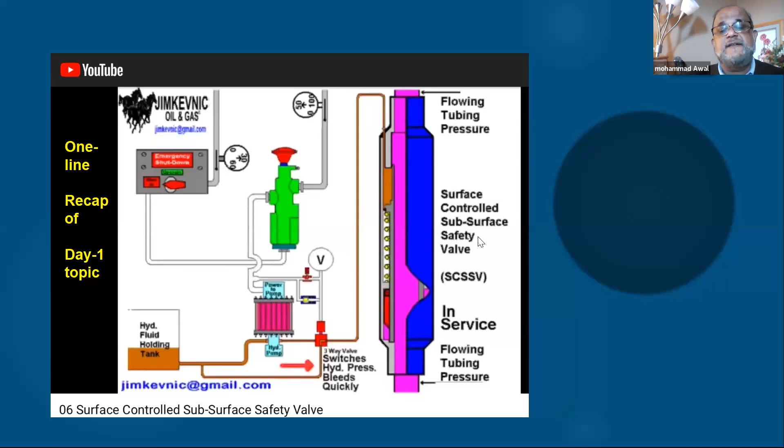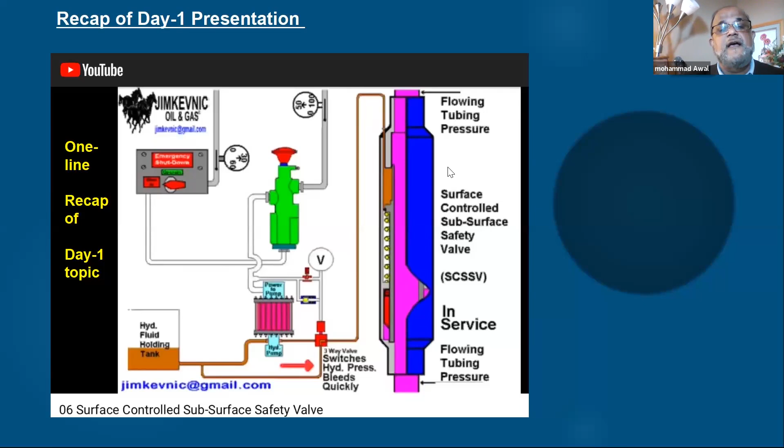Okay, so with that in mind, I want to spend a couple of minutes on yesterday's presentation as a recapitulation, if you like. If you remember this, fine, if not, then this is what you call the recap of yesterday's, and I'll give more information.

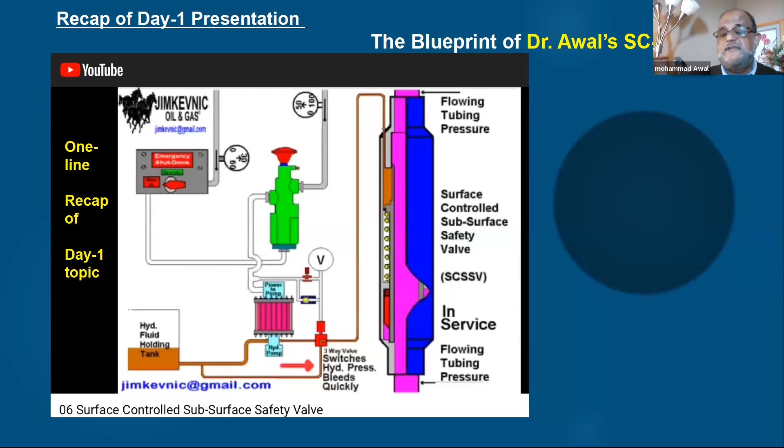So I call it Dr. Awal's surface control, allow me to use my name. Surface control, subsurface casing safety valve. And I invited you personally and through the quiz also, those who take the quiz, but in general, please let me know if you have found this new concept, which is an extension of the existing tubing safety valve subsurface. So this is the picture of the tubing ESD, emergency shutdown system, and it is for tubing pipe.

This tubing pipe setup has been there for at least the last 50 years to make sure that if something goes wrong at the wellhead, because of an accident, hurricane, tempest or sabotage, and the wellhead is blown out, there is no uncontrolled flow of oil or gas. That's why some 500 to 1,000 feet below the ground surface, this valve, shown in pink and blue, is installed and controlled from the surface. That's why it's called surface control, SC.

SSV stands for subsurface valve, but there should be one more S here. This is from Mr. Jimkevnic, oil and gas. He did a good job, but he has a spelling mistake too, so no problem.

This is an existing system, designed for tubing. Tubing and casing are the same thing really, there's a general terminology in the oil and gas industry, we call it oil field tubulars, OFT. It means the drilling pipe, the casing pipe, the tubing pipe, all these are called oil field tubulars, that's the generic category. Drilling pipe has a different purpose, so they're thicker because of load bearing and torsion requirements. Without going into details, we can use this system for casing too, which will be slightly larger, maybe by an inch or 2, 5, or 10 inches, but casing is still tube. So what's good here for tubing is also good for the casing part.

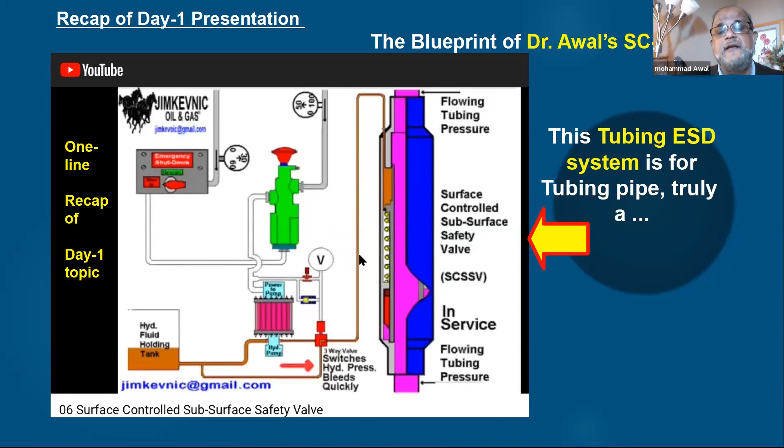I call this tubing ESD system, designed for tubing pipe, but it's truly a low hanging fruit. So what do we do with the low hanging fruit? This system, which I've named after my own name, not to brag, but to remind you this is a new idea I'm carrying forward so you can take it and make it happen as a casing safety valve, both on surface and below. You are giving the well safety engineering an autonomous safety device the world has been waiting for the past 120 years since the beginning of oil production.

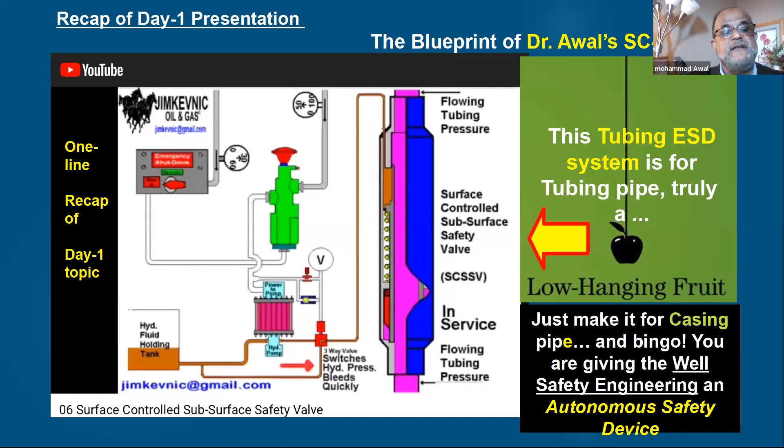This is no bragging, this is a clean fact, just like the sun shines. That's my one line recap of day one's topic. So what are you waiting for? I'm an old man, time to go, but you grab this low hanging fruit and give the industry what they've been waiting for. With that, let me move to something a bit more specific. This is really important.

Allow me again, so this is the conventional system. While drilling, let's say we are drilling to the production casing string, through the intermediate casing, and our target is to reach the reservoir. Once we go a little past the reservoir, say by 300 to 400 feet, we'll run the production casing. Then the blowout preventer, which was sitting on the intermediate casing head, will now sit on top of the production casing head, until we run in the completion equipment, which is the tubing strings with packers and subsurface safety valve.

And ultimately, it will be hung from the tubing hanger above this production casing head.

So when we have this blowout preventer, which is supposed to take care of any eventuality like a blowout and a gas kick, we often see it fails. And when it fails, then God help us - the devastation goes on. Once it happens, it takes weeks or months or even a year to control the flow and stop the currents of the mad well, if you like.

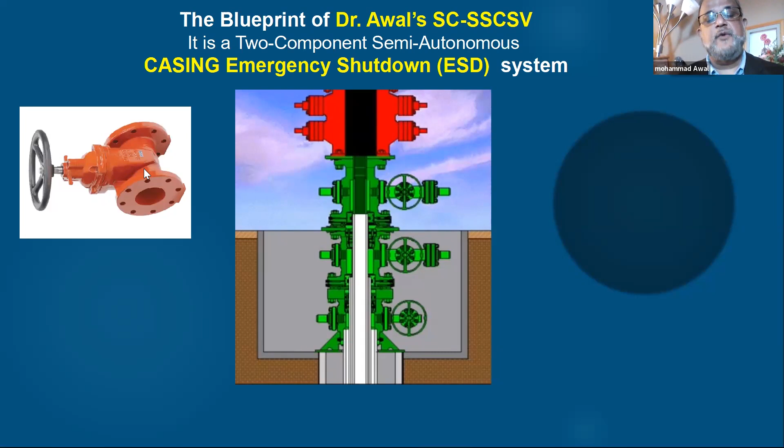I have put another picture. This should go somewhere in the top - where? I showed it just above this, the current casing head. It will go and sit here. So once you put this in, you'll have your own flanges with bolts. You just put it over there, and the BOP will go on top of that.

So you have this first, and I want this to be called a surface ball valve, or a gate valve - it can be a gate valve also. This diameter will be the same diameter. This ID of this valve will be the same ID as the ID for the casing over there.

And here is one thing: make it manually operated. We'll say, well, we have hydraulic control, electric control, why don't we do that? Remember, we are talking about its use after the accident has started - fire and fire and fire. So don't put those fancy things. For good times, for bad times, trust your good God-given hands.

Use it to turn this wheel. Okay, you don't need a daredevil - they are putting an umbrella of water on top of you as a canopy to keep you from getting scorched by the fire or whatever. This is the first thing.

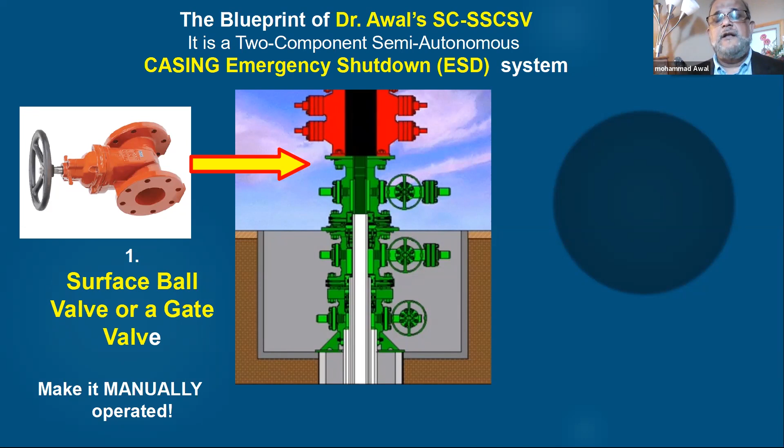So two is better than one. Yesterday, someone asked a very beautiful question, and there was not much time to answer that because most of you in the Middle East were going for iftar. So I had to give a very short comment, but I'll deal with that fully on the last day, the final day - what happened to the Macondo well blowout.

We know there was a huge investigation, which is good, and the final report gave advice that there should be two sub-sea blowout preventers, not one. In case one fails, the other can work.

It is fine. But as I mentioned yesterday, when it was going on the third day of the Macondo blowout, many petroleum engineering professors, including myself, from America and also South America and Canada, were present. They were invited beforehand, a month before that, so they kept that commitment. We were in Houston, taken from our hotels by BP, British Petroleum.

No, they call it BP - to their new, beautiful, truly marvelous headquarters in the energy corridor of Houston. The vice president of research welcomed us and gave us a talk, but he didn't talk about the Macondo blowout for whatever reasons. Fine.

But when the investigation began, after two months, we received an email in each department of petroleum engineering that the government inquiry commission had compelled BP authorities, among other things, to give some funding to develop new ideas on how to handle this kind of situation.

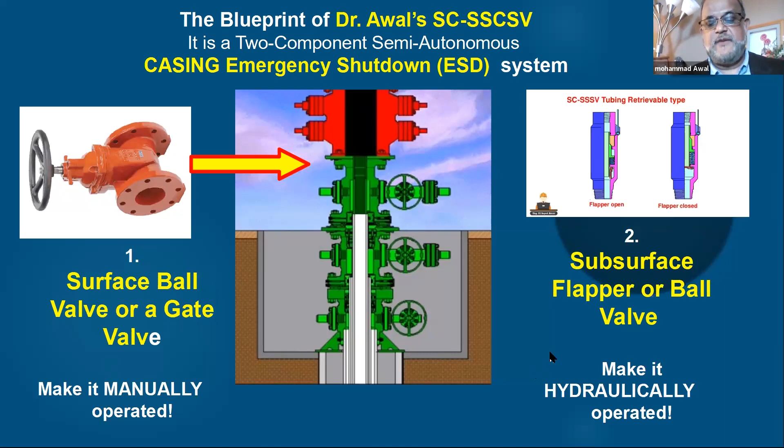So again, before I leave the slide, I emphasize: don't bring this idea of hydraulic control over here. Hydraulic looks hi-fi, high-tech, good, but not for here, not for here. I have explained, so let me go forward.

So now we are continuing our journey, and today is day two. Day one was what we just recapped. Day two is today: sustained casing pressure, and what we want to present today is a sustainable approach to fugitive emissions from wells. Sustained casing pressure means the casing annulus has a valve at the top, so if gas comes into the casing annulus because of faulty cement, it develops pressure, and that is called sustained casing pressure.

The practice is some operators go to the well and bleed that pressure to keep the casing safe from increasing pressure. But I believe the greater emphasis should be not to protect the casing - yes, we need to protect it, that is our business - but to protect the environment. We'll see how much gas goes to the atmosphere, and that gas is methane, not CO2. Methane is one of the baddest of the gases, more than CO2, 40 to 70 times worse.

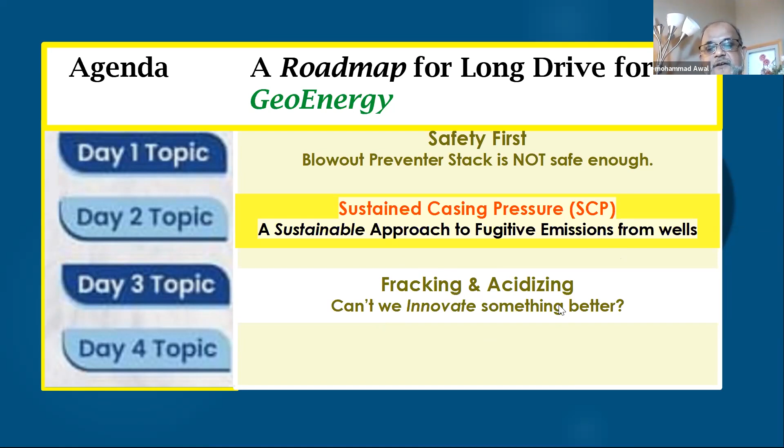We'll see that. And of course, tomorrow will be fracking and acidizing. Again, this is connected - why we need fracking, because of something we'll discuss. Ultimately, we'll put everything together to rebrand petroleum engineering. Because when people hear petroleum engineering, they say, 'Oh, you are the fracking guy, you are ruining the environment,' and they blame us for all the new CO2 from combustion. So we don't want to carry that name - we want to explain that we are not guilty, but to prove that we can convert hydrocarbon to hydrogen ultimately in the reservoir.

In between, we have the transition path to catch up with carbon capture and sequestration and all those things. But ultimately, I believe there is technology, there is enough science available for the last 50 years. If you put them together - and that's why I'm sharing with you - then we can really convert hydrocarbon to hydrogen, not only at the surface, which many people are doing, but in the reservoir. So now, what makes methane emission harmful? I mentioned that, and here is the information. I'll go quickly.

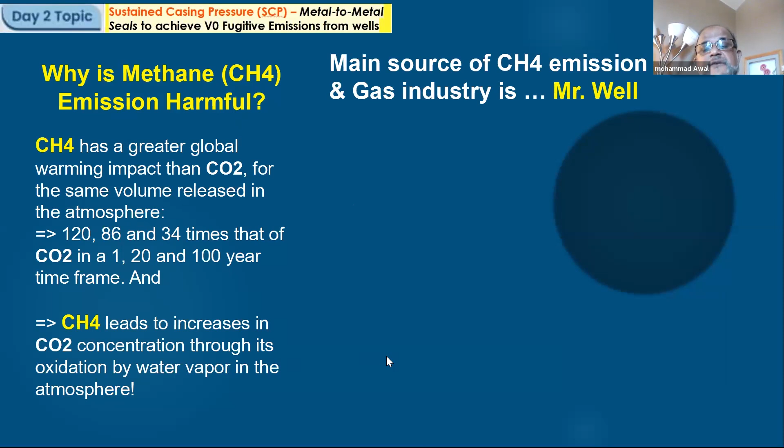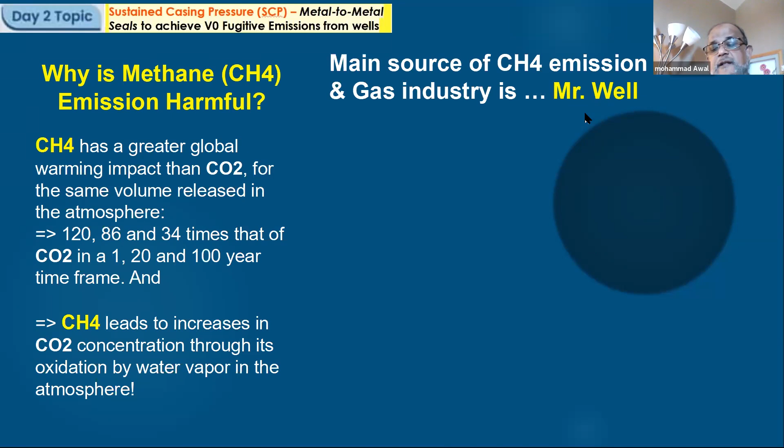So the next question is about fugitive emissions, definitely from the oil wells, that's what we mean. We picked that up, that is our business. We are not talking about methane emissions from cow dung or animal droppings, that is not our business. So we are petroleum engineers or mining engineers, and we ask ourselves, from which part of the industry is this gas being leaked or released into the atmosphere? The answer is Mr. Well. Not Mr. Jackson Well or Mr. John Well, no, it is this well.

Now this is not my drawing, this is from a journal paper. I think I put some link somewhere, so you'll find it when you click it. It's a scientific journal paper, and it has identified 6 different problems with the current best practice.

Why do we say best practice? Because we have to put casing and we have to put cement behind it. The mother of cement is called Portland cement, but the American Petroleum Institute, through decades of research by scientists, advanced the formulation by adding many ingredients for different depths and environments that the cement will encounter. We call it API class cement, A, B, C, up to G. That's tremendous good work, but the question is how good it is underground behind the casing over time.

These kinds of problems come up. The net takeaway is that they are not holding their fluids as they're supposed to, from flowing through behind the casing, which is the cement and the formation. They're not doing the job because they are not good, the Portland cement and whatever ingredients you put in it.

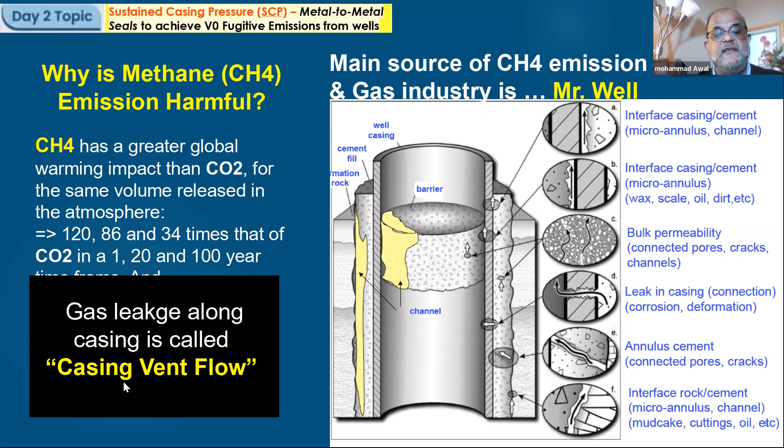Now there is another flow from the same source, the same reservoir, called gas migration. This is your source, the production zone, oil is there, and there will be dissolved gas, or if it's gas everywhere, no problem. So if the cement has a problem, it will not only go up, because at the surface it's not open, the casing is closed with a valve, so pressure builds up. When the pressure builds up, you are worried it may destroy your tubing or do harm to your casing itself.

But that pressure also helps drive this through this part over here. And it goes out, because this is porous media.

These are from some field measurements around the wellbore. They find that gas migration is around 10%, but most of it is 90%, because from time to time they open it. I myself opened in Bombay High offshore, and a certain amount of gas comes out. But that was 1983, 85, and those are conventional wells, not fractured, so we didn't damage the cement. Still, because of microchanneling and also debonding or imperfect placement of cement while cementing, there was leakage. But with hydraulic fracturing, the first thing you do is destroy your cement with 10,000 psi.

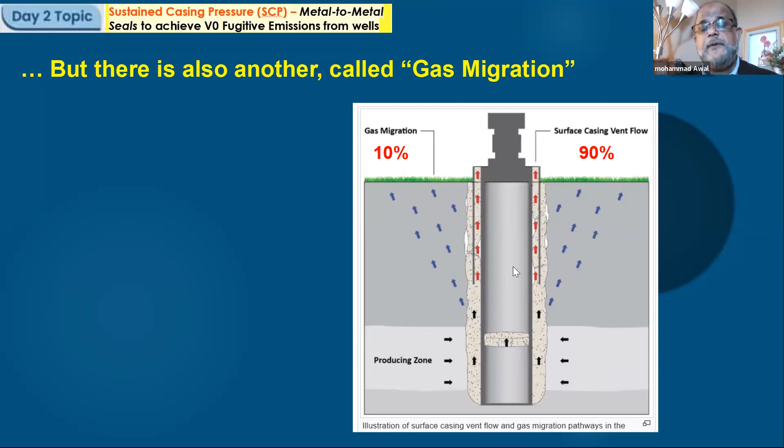But they pay money to some, even petroleum engineers, they call them consultants, or professors, God knows. And they say there's no problem, everything is perfect, everything is perfect. We are not criminals, blah, blah, blah. So let us look at the facts. So how much gas comes out?

Now here is some statistics in beautiful colors. I'll show you, all this color has a meaning. Who emits methane in the atmosphere?

We'll see the number one culprit is onshore petroleum and natural gas production. This is 117 million metric tons of CO2 equivalent. Meaning methane, remember, methane is 40 to 70 times more harmful than CO2. So they express the methane in terms of CO2 equivalent, and that is about some percentage.

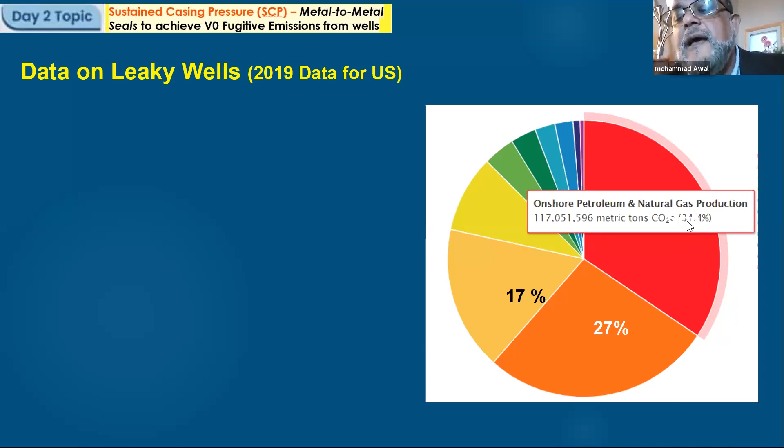It is not shown, but it will show over here. I'll show, yeah, 35%. And this is about US, and this is data from 2019, from US government source, US Energy Administration. It's very credible information. But all those numbers, since they come from reporting, this is the minimum. It could be more than that.

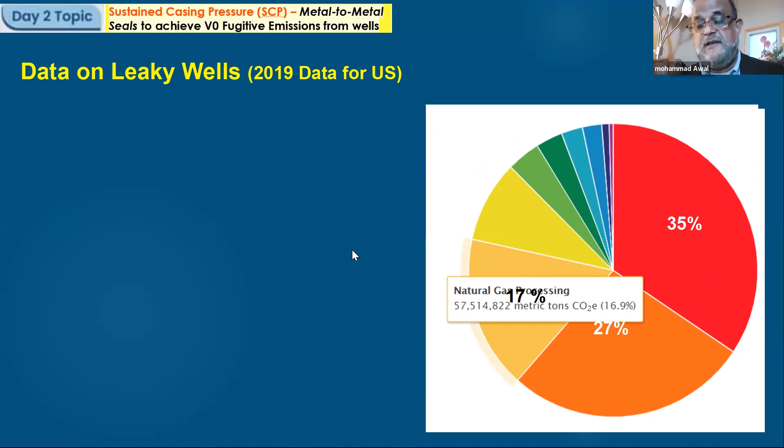So I'll bring out a table over here. Onshore production gives in US 2019, 117 million tons, which is 35%. Next comes gathering and boosting, 92.5. What is gathering and boosting? And offshore is very less, 7.3. Why? Because offshore, the capital expenditure is so high, and they have to get that money back over the next 20 or 30 years.

So they put the best casing, best pipe, and everything, and best cementing practice. That's why. And onshore, there are at least 10,000 companies. The biggest company is maybe, let's say, ConocoPhillips or Chevron or Oxy in America. I was an employee, research and staff, R&D engineer in ConocoPhillips from 2013 to end of 2015, so they are good, that practice is good.

But most of them, let's say 9,000, 500 are small companies, so they have to cut corners to make a business. And the smallest company is called mom and dad company, meaning father, mother, and the technician. So they cut corners, and that's why the onshore production emissions is so horrible.

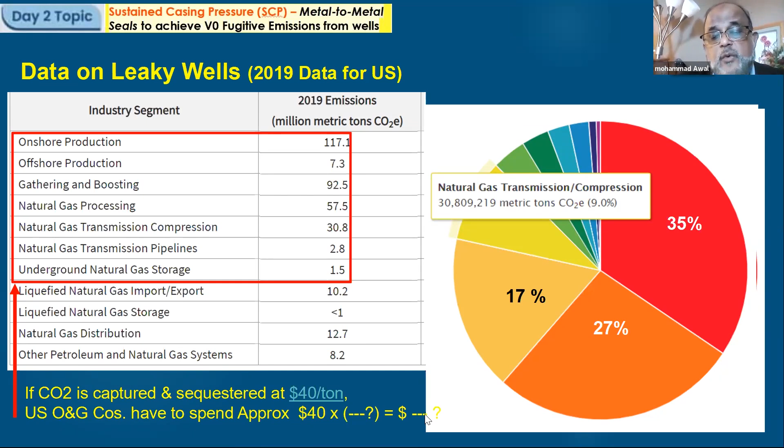So like this, ExxonMobil, the largest oil company in this country and maybe 15th or 17th largest in the world, has announced it will spend $100 billion over the next 5 or so years. What will it do? It will capture carbon dioxide from its facilities or from the atmosphere, and send it down into deep formations, far deeper than oil and gas reservoirs, for sequestration. $100 billion. So I want you to compare this number with that number, 100 billion, okay?

And that's a quiz. So I found here already, for this case, $5 billion. That $5 billion is in 1 year, 2019. So for 5 years that would be 25. But Exxon has put $100 billion.

Of course, as the news goes, the company is not putting all $100 billion from its own pocket. It will get some handout, some portion from the federal government, the economic stimulus package or whatever you call it. You wonder why so much? For the whole country, it needs $25 billion to capture and sequester CO2 for 5 years, but here it's 100.

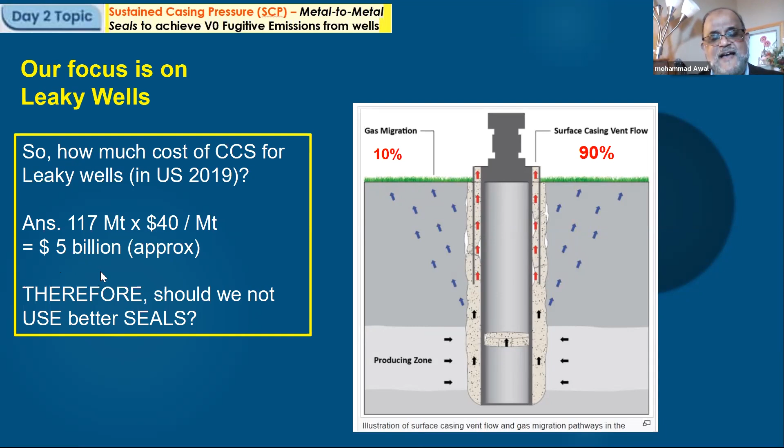So I don't know, you keep your guess. I mean an honest guess, not a conspiracy theory, I don't like that. Okay, maybe they'll rent the facility they have. Oh, we have surplus capacity, you have CO2, put it in over here, and the bill is $40 per ton plus our profit margin, whatever. So it will be just like making money by refining.

Do you know about refining? They are not very rich, they make a small margin. But since the sale is volume, that's how they make money. Per gallon it's very little. That's why in the US, when you go to a gas station, you see the gas price, $2, then 20 cents, then another 0.9, the fourth place of the decimal, okay? But because we buy so much gasoline in America, the highest consumer in the world, that's why they can survive from that small margin but big sale, okay?

Now my question is, that previous picture you have seen, the casing venting, they show only the production casing. My question is, we petroleum engineers know there are many casings. This is the production casing, the blue one. Then we have the intermediate casing, and ultimately the surface casing and conductor. Don't you think there will be something coming, venting from here, or migration from here, or migration from here? So that is my question, and I want your feedback. That feedback will come in the quiz. Or if you don't take the quiz, of course, if you're a professional, why should you take a quiz? You don't need that. I have given my email on the first slide, please let me know.

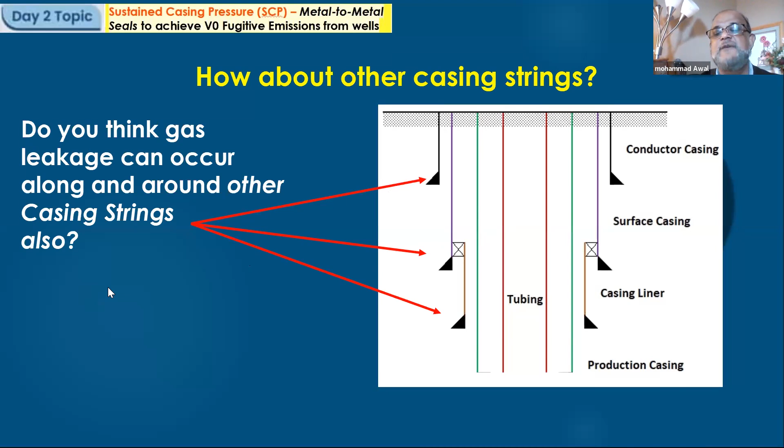Now, I come to some more business, something happened here, this I have shown. This is the ExxonMobil Ohio unconventional gas and oil field. Okay, there was all these wells, one well here, and one well here.

Why are they so close? Because nowadays, to cut the cost of shale drilling, completing and fracking, because the oil price went down in 2014 from $100 to maybe $39 per barrel, this is a survival technique, mother of invention. So to cut the cost, to beat the low price, they drill what they call a drilling pad from one drilling site, 1, 2, 3, 4, 5, 6, they drill directional wells. You don't have to go far. So one rig will be there, and they call it a walking rig. The walking rig will drill one here, put the casing, and by the time the casing needs some time to set cement, it will move here, and then it will come back, and go over here like this. It's just like one dentist and 20 patients in the dentist's shop.

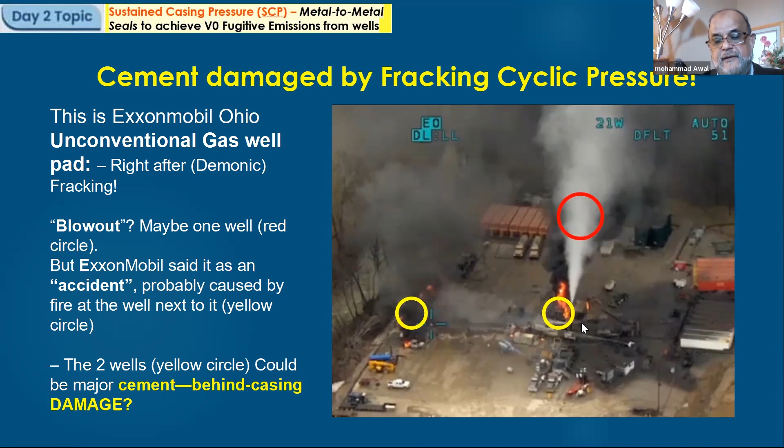So this is a blowout. Fortunately, firefighters were there, so there was no fire over there. So this is a blowout, and these are proof of the pudding that cement failure is much worse during shale fracking because of high fracking pressure, which the cement is not good to take.

Now there are many reports, but I have selected a very credible source. Why credible? This is USGS, United States Geological Survey, a federal organization. They answer the question: can hydraulic fracturing impact the quality of groundwater or surface water?

By the way, this hydraulic fracturing here doesn't mean conventional hydraulic fracturing. It means shale gas or shale oil hydraulic fracturing, which has to apply much higher pressure to break down, and for a longer time. And they have given an answer, so I have made this answer a little bigger for you to read.

It says this is the same thing over here, but I just copied and pasted: conducted properly, hydraulic fracturing, or fracking as people say, has little possibility of contaminating water supplies. Water supplies means the groundwater.

In Texas, we drill a water well around 200 feet below. There's a huge aquifer, starting from Montana north, thousands of miles, a natural water reservoir. During those millions of years, 30 to 50 million years ago, there was huge rainfall, and it went down and formed a super giant aquifer. It supplies water to several states in America, from Montana, 1,000 miles from here, all the way to New Mexico, Arizona, and Texas, and its name is Ogallala.

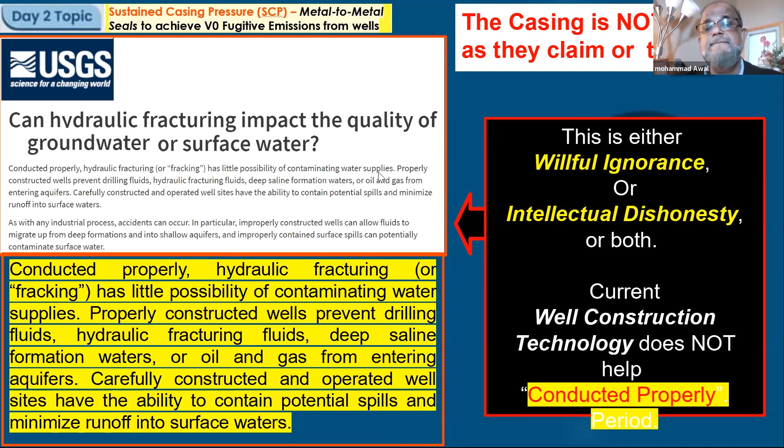So be careful. Now I take you to one fine place, again in the north side of America, near Ohio or somewhere, where we have the Marcellus Shale. Everything looks perfectly green, beautiful. And they say we put casing pipe, we put cement, this is thousands of feet below, there is absolutely no chance for anything to go wrong. And those who complain about groundwater, maybe they are fabricating this.

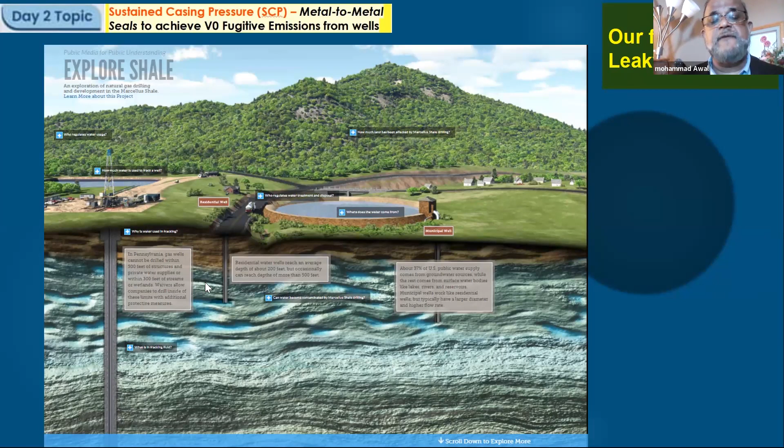But that's again a lie, because this is a statement. It is not my statement, this is from a credible source, published. Researchers postulate - why do they postulate? Based on knowledge of rock mechanics, strength of materials, that leakage problems are more likely to happen in unconventional wells, in shale, which are hydraulically fractured, than in conventional wells.

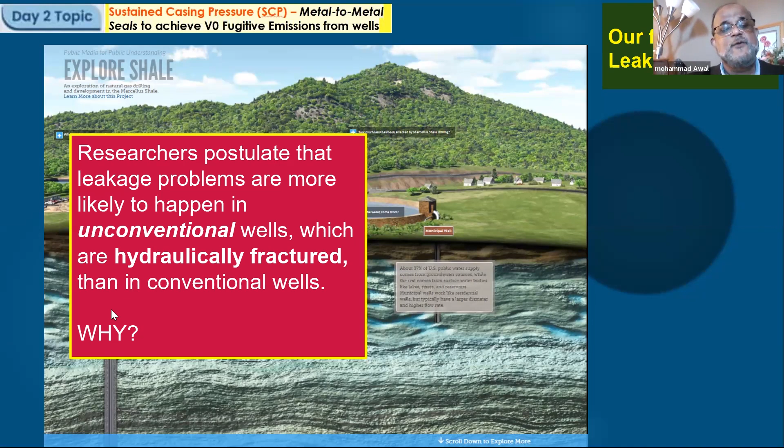But now the question is why. So I have tried to give that. This is 10,000 feet long casing and cementing. They say no, that is not the case. I'll tell you, so you did this part yourself, and I will show you what I have written here.

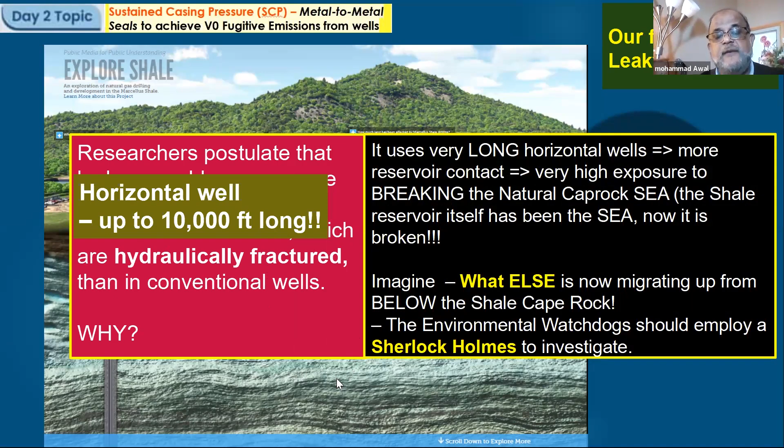So this is, let's say, a 10,000 foot deep well somewhere underground. This horizontal well is deviating, it becomes horizontal, and they frac in stages: stage one, stage two, stage three, up to 150 stages, about 10,000 feet long horizontal well. Every stage they have to frac at around 20,000 or 30,000 psi and keep pumping, boom, boom, boom, boom, boom. All the casing, the fluid goes to the surface.

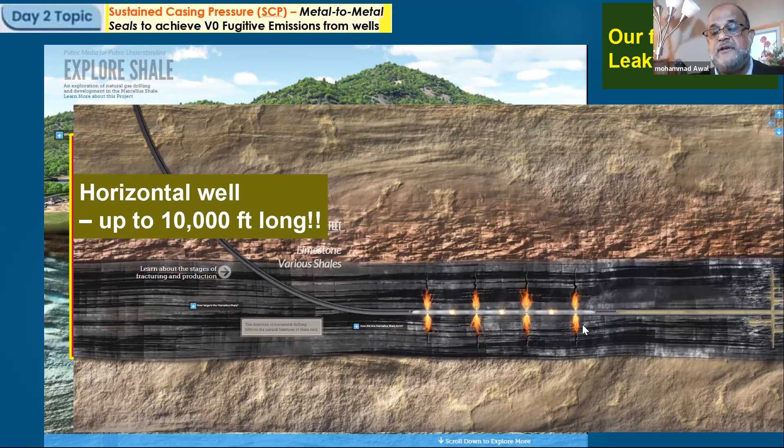Everywhere the cement behind is under tremendous jackhammering action, compression, decompression, compression, decompression - it is devastating. So I'm bringing now what is below that. Do you know what this shale is? Shale is what we call cap rock. It's impermeable, that's why it has been there for millions of years, stopping the migration of fluids from below.

Now when these fractures go up, fractures go down, fractures go to this side - imagine if the fracture goes like this. The fracture could be 100 feet long, 200 feet, 500 feet, 1,000 feet long. Imagine this fracture coming over here. So now there are fluids here, in the porous media, with sulfur, with heavy metals and whatever, plus hydrocarbon or whatever. All these things could not come out before.

They were locked down hole like Aladdin. Aladdin was sleeping inside that lamp, fine. But the moment you rub it, it gets hot, it comes out as smoke. It says, I'll kill you. Now that is killing us. All those things are now released.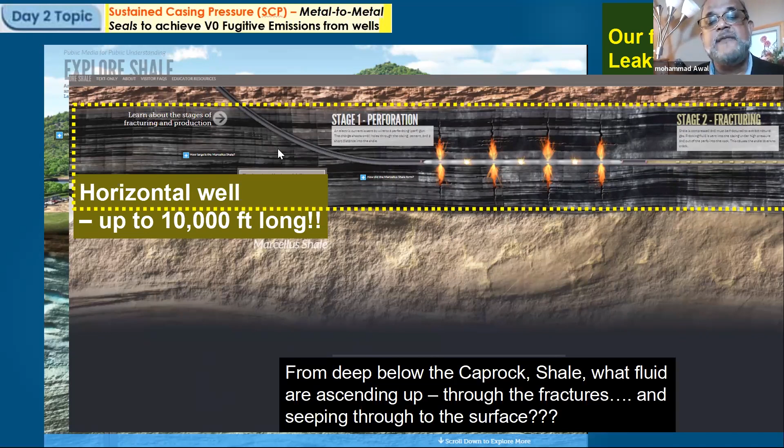And they say, wow, come, there's a highway. All these casings are as much shattered as this rock over here. This cement is not hard enough, it's not strong. We call it fractures because of tensile failure. Those who know rock mechanics, they know what compressive failure against compressive strength is, and what tensile failure against tensile strength is.

Rocks and concrete are very weak in terms of tensile strength. A concrete bridge or building has 10 times higher compressive strength - that's what lets them take the vertical load. But when it comes to tension, they're very weak, maybe 1/10th to 1/12th. So this shale has maybe tensile strength of around 1,000 psi, pound per square inch. That's why it is easy to frac them, and you want to frac them long enough, that's why you need 20,000 psi.

The cement is weaker than the shale. I measured that in my rock mechanics lab, which I established in the Department of Petroleum Engineering, Texas Tech University, which I first established at the Research Institute of King Fahd University in 1995. Then we, with money from Saudi Aramco, did rock mechanics and geomechanics research for them. Saudi Aramco has its massive advanced research center with a sophisticated rock mechanics lab.

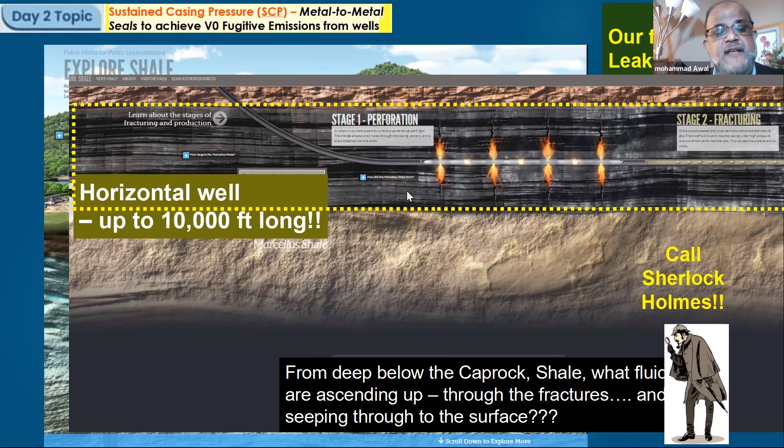So let us continue with this. Now the question here, the learning takeaway from so far—I wish I could give you a break. If you want, I can, but I have no control.

So the takeaway from here is that casing is not enough. Because of the cement behind it, it's not enough. There are huge emissions, and I have shown you real statistics from the government. The actual number is much more than that, and there are some links—if you hover your mouse on those slides, you'll see the links.

So we have to conclude that this Portland cement, and its advanced form customized for oil well environments, was doing a good job until massive hydraulic fracturing came along. When fracking came, we know all the praise for horizontal drilling and putting hydraulic fractures in, but we don't talk about the bad things. That is not fair—in the scientific community, they always look for pros and cons, the merits and demerits, the good things and the bad things.

Why? So that we can do further research and remove the bad things. Now we see that with cement, we cannot do anything other than replacing it with some other advanced material, some kind of polymer, and those things exist. Plus, cement alone is not enough—two is better than one to protect the defense, and three is even far better. So here comes the question of metal-to-metal seal.

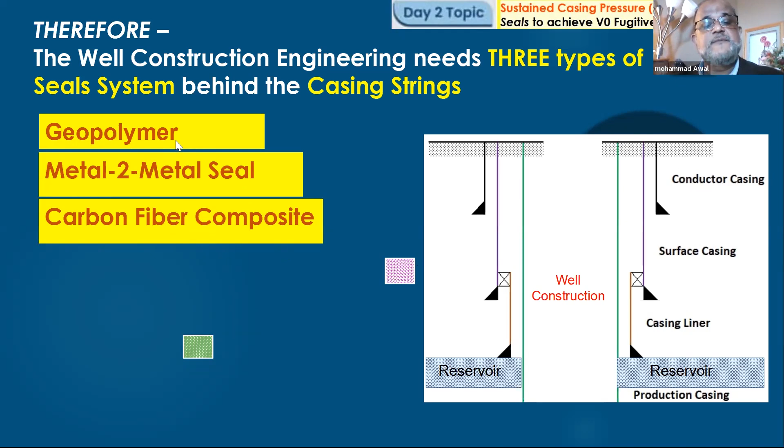That dual objective helped me find out something, and I'll show you. Cement has to be replaced by something, and it has been there since let's say 2000 - geopolymer from France, I'll show you. The API class of Portland cement is very inadequate. It's been there since the late 1800s, but because we didn't frack at that time, which was good.

We started fracking wells from 1947. Even then it wasn't that bad, but after 2000, thanks to the brand new fracking technology invented by a tall, old petroleum engineer, George Mitchell, may God bless him - he is now not around us - the world embarked on massive hydraulic fracturing to frack the unthinkable cap rock, which is shale, to find every amount of gas. It has no permeability, so we break it down in a demonic manner to bring it out, and that high pressure creates problems.

So we need to go about geopolymer. This is what I'm presenting to you. Now I look at this diagram - I know my students are there, and all the books showcase it with a shoe, as if they put a shoe over there, and it looks like a shoe. No, it is not like a shoe, it is like a stepper down, but this creates a mental block.

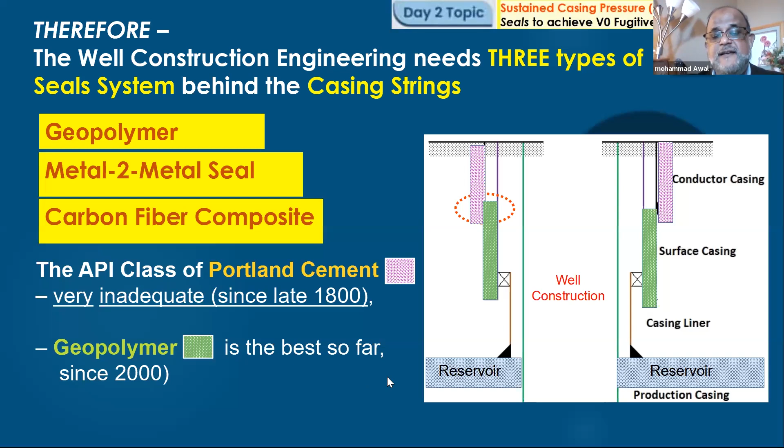A little bit of a story about geopolymer - this is the inventor of geopolymer. He's a chemical engineer, Professor Davidovits, in France. Now he's become world famous. You'll read that he has shown that the pyramids are not rock blocks cut from some mountains and then hauled - they were made on site, and he's making it himself in his research institute, called the Geopolymer Institute. It is now world famous - you can go and see, and make it yourself.

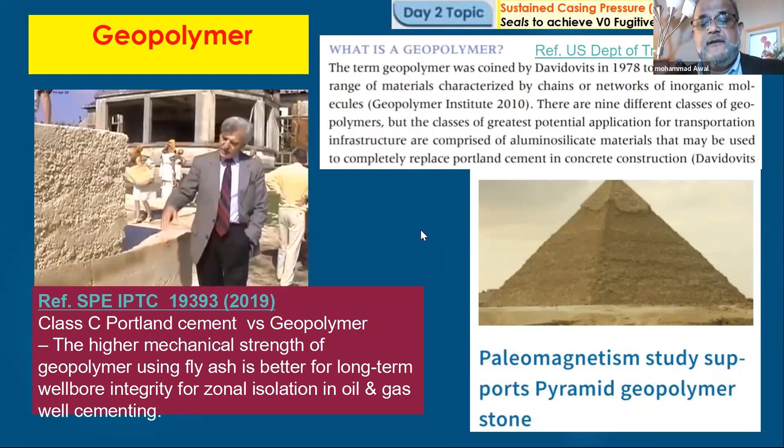Let's come back to our industry, the oil and gas industry - the classic Portland cement versus geopolymer. Here is the verdict: it is already proven, but we are slow to move.

So now I move to the other one, metal to metal. There are two concepts now: one is called type 1 thermite seal, and the other one I'll show first. Thermite seal means you take a mixture of rust - basically hematite, rust, I'll show you the diagram, ferric oxide - and aluminum powder, mix them together at certain ratios and provide some source of heat, because this is an exothermic reaction, but it needs a starter, and then it will catch up the reaction.

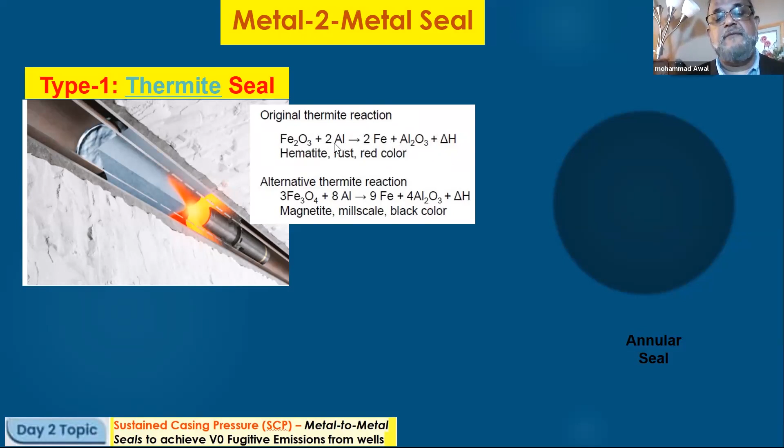Extremely high temperature will be produced, around 1500 degrees Celsius, to melt it. The ferrous that comes out from the reaction is iron, in molten state, and this is aluminum oxide. Aluminum metallic powder takes the oxygen from here, and this is a massive amount of it. So this is the simple technique. They call it Goldschmidt.

This is from 1895. They use this reaction in railroads, to make connections between two rails, they use the same thing. You'll see lots of YouTube videos on that. There is another oxide, but same thing ultimately. It's so high temperature that in some experiments it melts the steel also.

So this is good when you want to close the well bore permanently, meaning plug and abandonment. We put cement plugs before abandoning a non-economic well, but that cement is cement, so they say put this one, steel everywhere. It will make it enough so that it goes even inside the rock. That is called a thermite seal.

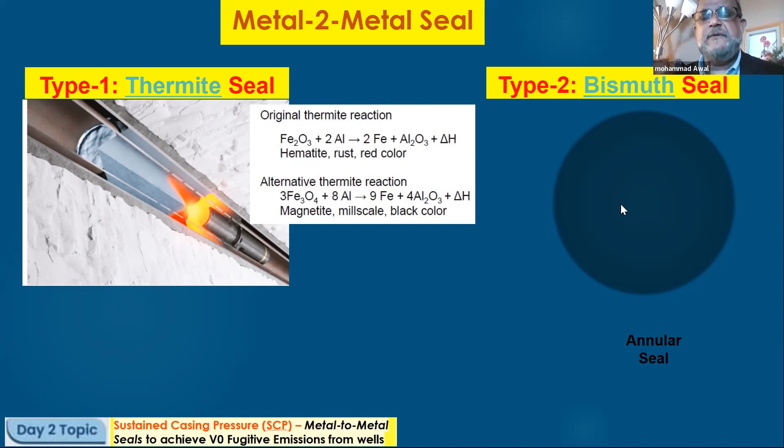Type 2 is bismuth. Bismuth is a metal. It is slightly heavier than iron, but when in molten state, it is as viscous as water. So it can be poured easily, especially in the annulus. Its melting point is very small, around 271 degrees Celsius, so not much.

So what you can do is the same thing. If you click here, you will see the whole process video, similar to this. It can create a solid smooth plug, and one benefit is when it solidifies, instead of shrinking, it expands. So if you want to use it as a seal instead of a Portland cement plug inside the casing or your production tubing at abandonment, this is your best bet. Of course, the reservoir at the depth where you intend to put this bismuth plug for permanent sealing, the temperature should not be more than I guess 200 degrees Celsius.

But the other benefit is, suppose after some time a geologist from your company comes and says the oil saturation is still high enough, and if you do some fracking job it will produce again and become commercial. Then you just put an electric heater to melt it. That's it, whatever - that's not my purpose here. This is called plug and abandonment.

Now, how about those seals I have shown you - in between the casing, we have cement behind the casing as a seal, so there is no migration of fluids behind the casing. You can also put this over there.

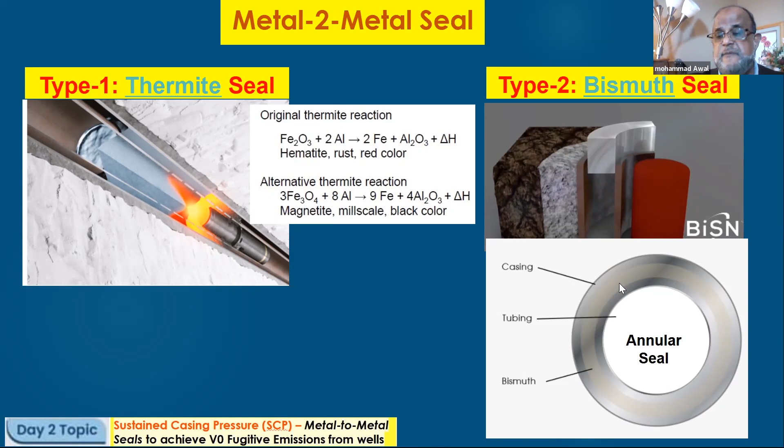I said, wow, 3,000 years? But nobody will be remaining to verify it and sue the company - excuse me for being cynical. No, because there is some science question behind me which I want to share with you now. That brings this question, which will be very dirty for those companies like BiSN, because they have just started business and I'm trying to puncture it. No, it is that we care for the environment. That's why it cannot be long lasting than cement, I guess, because of one simple reason, and I'll show you.

First, I'll show you where I want this metal seal, M2M, metal to metal seal. Let us take bismuth, which is good - you will love that video as I liked it. This is since 2019, only 2 years old. Metal to metal seal technology has been field tested. On that website, last page, last slide, you'll click and see - I verified some of them have come up in Offshore Technology and even in JPT, and they have presented at SPE conferences.

Like there, perfectly well, thumbs up. But when you come back home, you may say, oh, there is a question. So I'll bring that question. But before I go there, let me show you how to put the seals.

Where we have, let's say, geopolymer, there should be some seals over here, between this casing and that casing. While we run in the casing and put the cementing, at the same time we should put the seal. This seal is called bismuth seal, and this is during well construction.

Put here also, 2 is better than 1. We have cement, but now this will be as good as in 1983 when I used to open the casing valve. Finish, safe, go. Do here also. This is my production casing all the way, then go put here also.

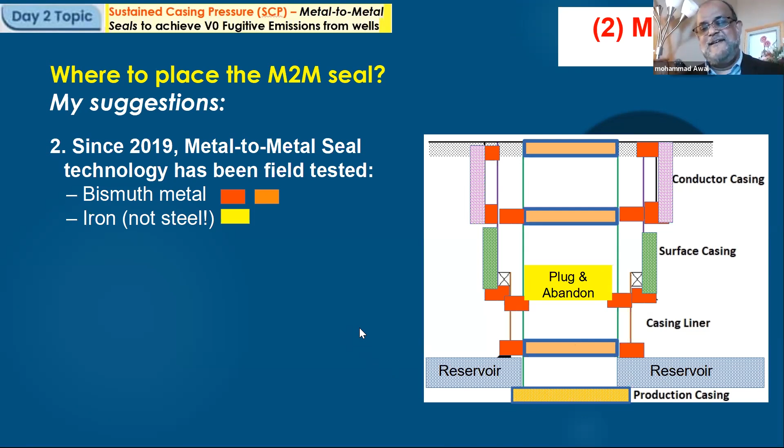Now, the pros. Now, how about the cons? Both types of seals are technology ready. Yes, they have been tested in America also and many other places. But you can improve both types of seal with geopolymer and metal-to-metal.

Before asking that question - nothing should be settled for another 100 years. Why? So much research has been done. They are waiting to be picked up like low-hanging fruit everywhere. You come and pick them, and nothing should last here more than 5 years. Let this company make some money on whatever they have invested, then we bring a new technology.

Now, geopolymer and metal-to-metal - I'm sorry, I'm going fast - metal-to-metal with bismuth, or with iron, thermite. But find out something better. You can find it, I can guarantee you.

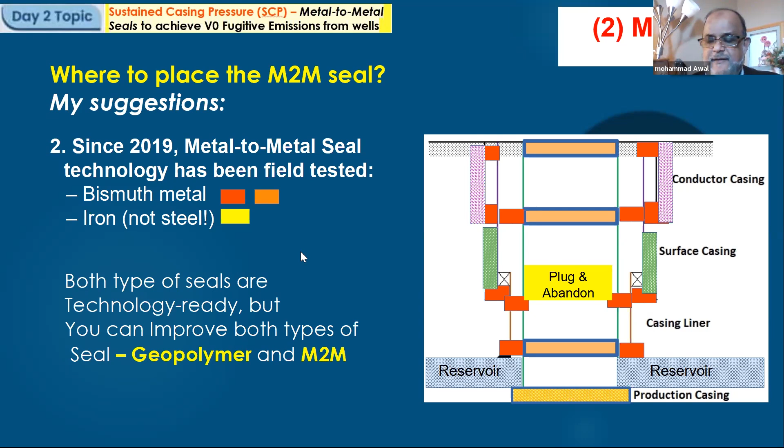Now I ask the question which I have been hinting at. You must be getting a little bit bored - he's not telling us, he's not telling us. Now allow me. Let us see what science says about the longevity of bismuth and iron seals.

Both are obtained from nature in their oxide forms - ferric oxide or ferrous oxide, or bismuth oxide. So in the harsh downhole environment, there is no air conditioning, there is no cathodic protection. So the iron and bismuth seals will soon get back to their native state, oxidized. This iron came from this, it will go back. This is rust, and this is also rust - black rust, and bismuth oxide.

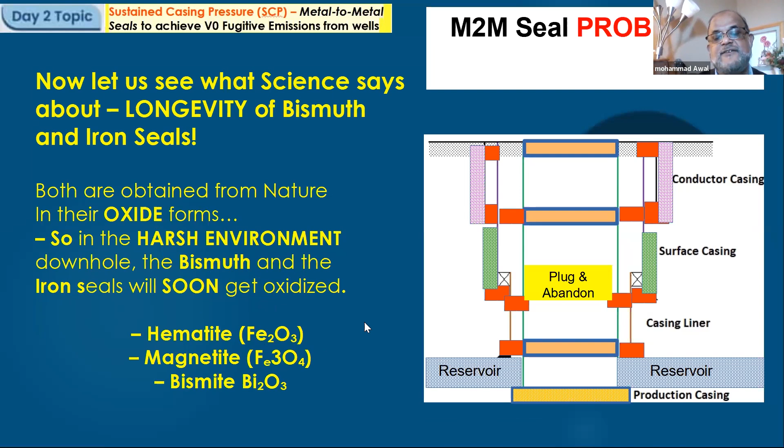I'll show you - so this is rust, this is ferric oxide, and this is ferrous oxide, the black one. And how about the bismuth? This is bismuth oxide. This is a host rock, and this yellow part is powdered bismite.

So how long does it take for a piece of iron - not steel, not stainless steel, iron - to get rust? How long? Take an iron nail, or even a steel nail, not stainless steel, put it in lemon juice, and after 1 week, take it out and you'll see how much rust is there. And how about bismuth? I have not done an experiment - suppose 5 years, so it cannot be more than that.

And they claim 3,000 years. So we are bringing science to contest them, and we should, because our purpose is to do a clean job and good job and ensure a sustainable environment. This is an obligation on us, not because of the Paris Convention - we should have done it much before.

Past is past. But from now on, since we have so much technology, so much science around us - we are living in this world, me maybe a couple more years, you too, but who will survive? Our sons and daughters and their children, who will be my grandchildren. Now, all people love their grandchildren more than their sons and daughters. We know that every culture, east to west, north to south, grandchildren are so adorable.

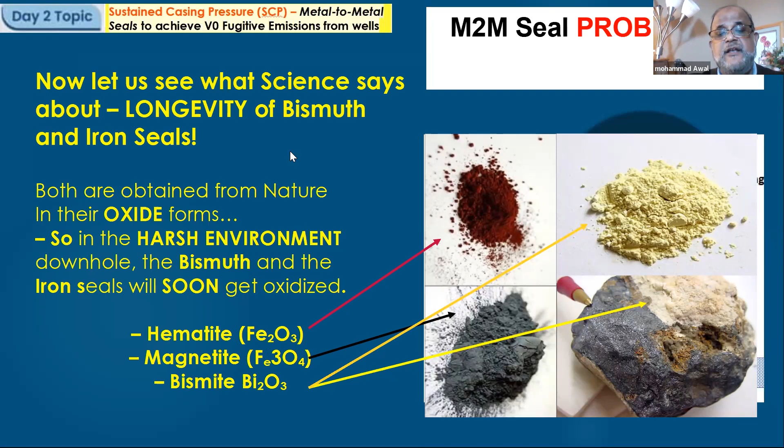So leave something good for them. At least I want my grandchildren to know that their grandfather, this guy, left something, tried to do something through that book chapter, through his invention in the same year, which will be the meat, or a main course. I should not say meat because many people don't eat meat. I respect that, it is all your choice, as good as mine. And so the best food, the main course tomorrow, and the day after tomorrow a little also.

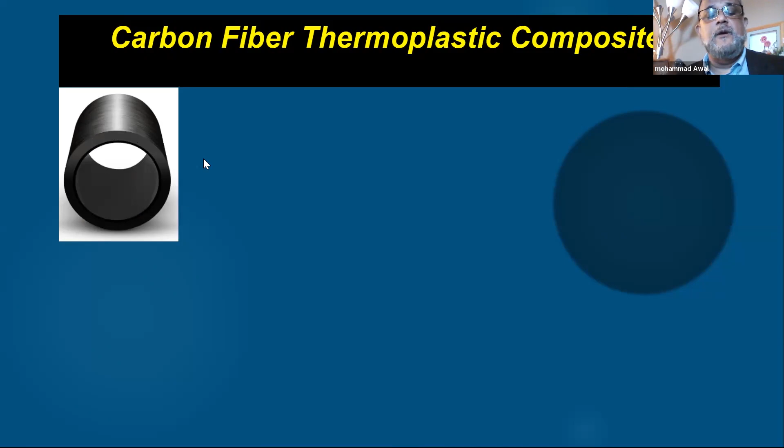And the answer is, can you guess something? This is something? Yeah, composite. Now this is a company called Magma Global in England, I guess. They have produced pipes. Now these pipes, this is just a sample to show you and us. If you click the website, they call it Carbon Fiber Composites for Oil and Gas Industry, Composite Pipe.

Why now? Because of the awareness. It's from Europe, they're ahead of us. Many people in America in the scientific community, but in the business, oil and gas, we are following them, and we should follow. Not only follow, we'll become the leader. By activating ourselves up. The process has begun.

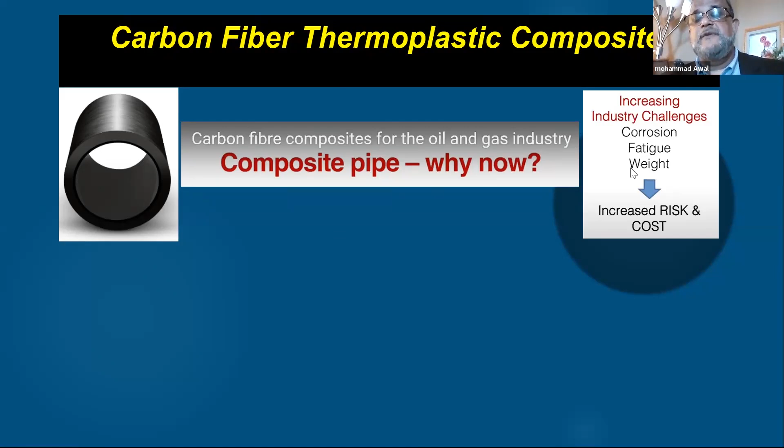So there are some answers to that question, but the main reason is increasing industry challenge because of both the oil price that we have to keep going, and then comes this corrosion, fatigue, weight of these long pipelines, the casing or tubing or whatever. You need huge rigs, everything. So imagine you are using this pipe, which is very light but as strong as steel, and you use it as a drill pipe or you use it as a casing pipe. Would you need those huge rigs or huge trucks to carry them and destroy the environment on the way? So this is, and also the risk.

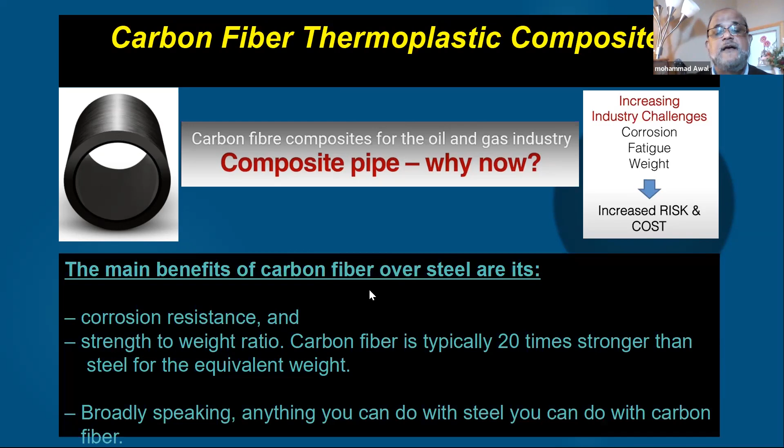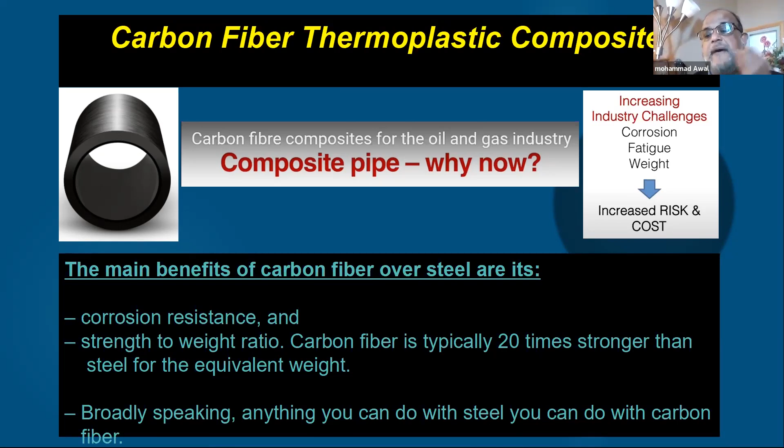So here come the main benefits of carbon fiber over steel: corrosion resistance, strength to weight ratio. Carbon fiber is typically 20 times stronger than steel for its equivalent weight. It is very light, so if you take the same weight, that will make it thicker, then it will be 20 times stronger. This is just a matter of comparison, you don't have to make it thicker. And broadly speaking, anything you can do with steel, you can do with carbon fiber, and I believe in a better way. So this is the next big idea.

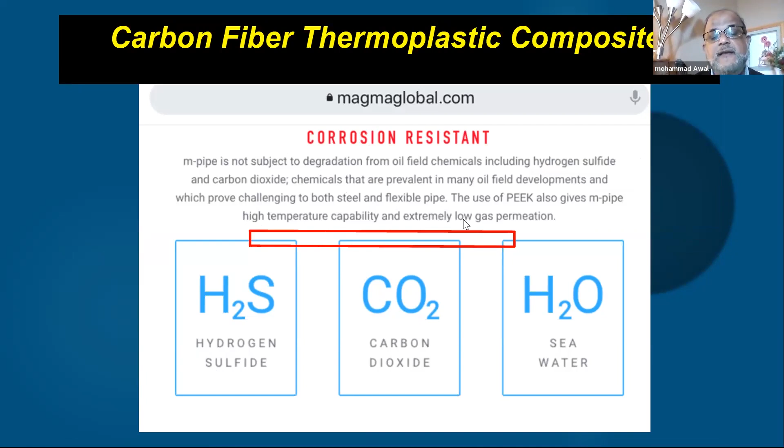And this is just a follow-up to that, that for stress control it's good, in an H2S environment, CO2 environment, and H2O environment. Then I have put here a red bar. Why? Because something is coming here. So this is a chart about hydrogen permeation. Permeation means that hydrogen finds permeability inside steel, like helium, a little bit of carbon dioxide also, and methane. So this is the table over here.

That thermoplastic is not very strong, so they wrap it within carbon fiber. Carbon fiber is very strong. That's why layer upon layer, the thermoplastic like Teflon, which is weak in mechanical strength but good, is a good preventer in terms of allowing hydrogen to escape through it.

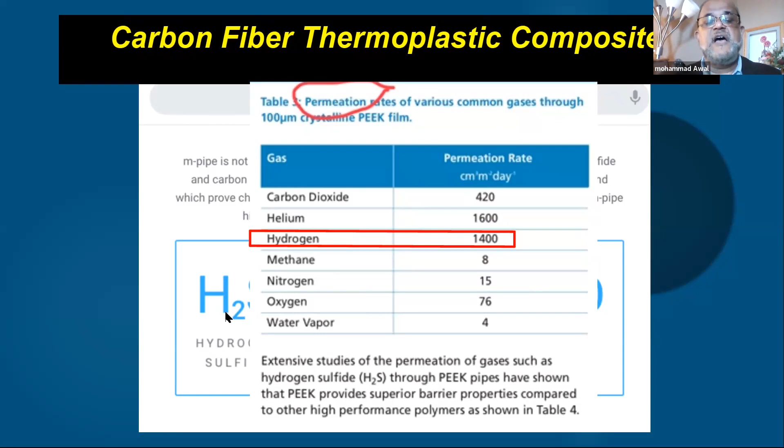The whole thing comes over here. So they are using this to create those offshore lines, oil collections, tankers, to the platforms. They call it those riser connections with this pipe. Okay, so you can also use them in, let's say, coil tubing drilling with steel pipe. Imagine this kind of carbon fiber reinforced thermoplastic composite pipe.

It's much more flexible than steel, and it is much lighter, and it is stronger. You'll have just like driving a 10-ton truck versus a Porsche car. Using steel coil tubing for coil tubing drilling or for stimulation jobs versus using this kind of carbon fiber reinforced thermoplastic composites, it will be just like driving a Porsche car.

All right, now there's a company that took a survey among oil and gas companies asking, are you ready to use it? Now as you see, more and more people are saying yes in every count, but you'll see also some no. And you know who are those no's? The old dogs - you cannot teach them a new trick. The young generations, young engineers, are better educated than the old ones. Of course, no offense, but those who don't keep learning for the rest of their life, they become old dogs.

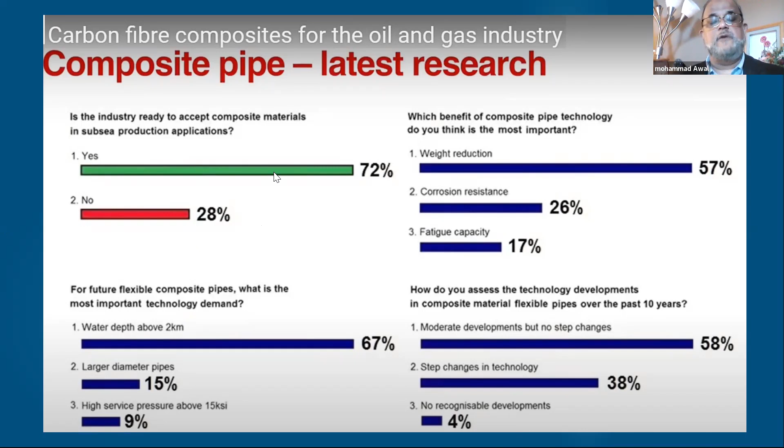And this is the thing, so I'll not go beyond that. So this is my last slide.

So I want to now recap both day one and day two. Day one we talked about these huge problems unsolved for the last 120 years, since 1901, 100 years - oh my God, yeah 120, right? 1900, 2000, yeah, 120 years. I'm right. So still it's going on - cry, cry, cry, and lie, lie, lie.

And the oil and gas industry and the academia, they are not paying attention, for whatever reason - no problem, no complaint. The good thing is that we have done something about it, and that Casing ESD System. And I would like you to see it developed and deployed, the system.

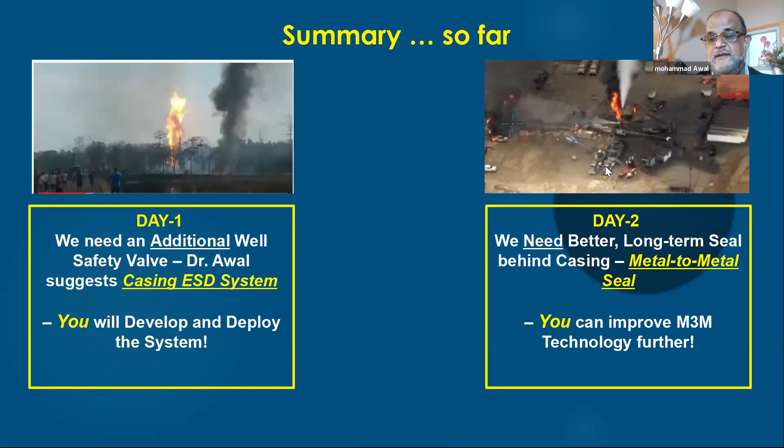All right, so it's a burning problem. It burns my heart because at heart I am an engineer. I'm a petroleum engineer, and I think we can do things in a much better way. Okay, let's do it together.

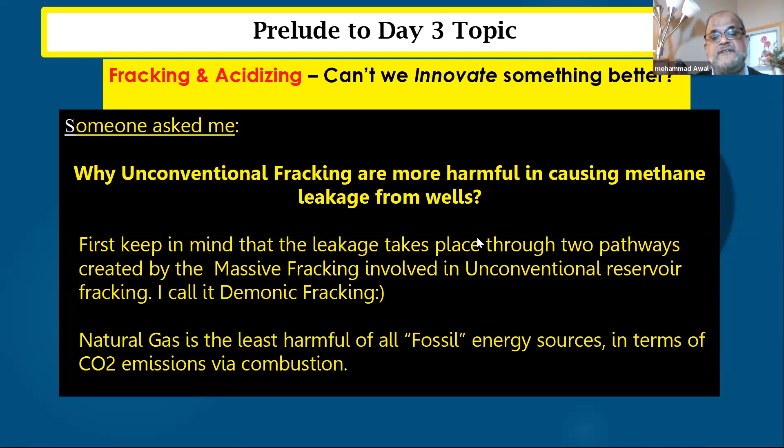And this question, someone asked me 2 days ago on LinkedIn - I have answered. The question was, why is unconventional fracking more harmful in causing methane leakage from wells? I've given it in details to you, so I'll not go through it - you go through it, I have given answers. Some people have liked it, but if you find that I'm missing something, please respond to me. I'll appreciate that.

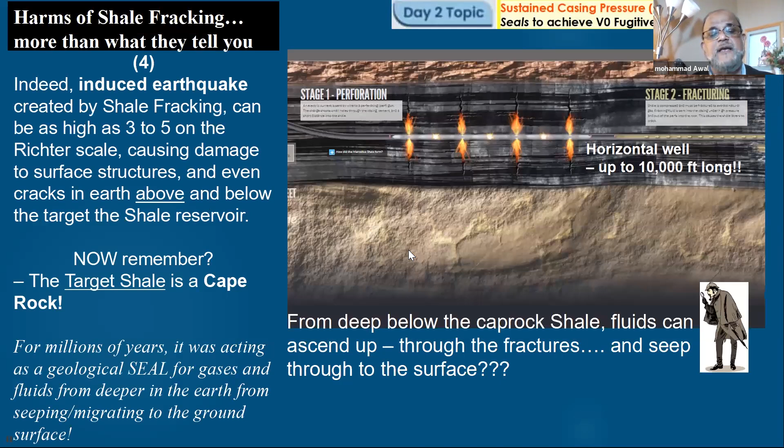Dr. Awal, you may have forgotten this or that, whatever, but I put all my reasons down. It's my own work, I just took my mobile and finished it with some spelling mistakes. Yesterday I thought I should share with all of you, so I've shared everything, including this. That is the end of the main presentation today, plus the afterburner, the last few slides.

Please read that. I'll ask questions to the young generation and the old, more knowledgeable ones. Obviously I'm still learning, so please put your feedback on the last four slides about why I believe, or why scientists postulate, that unconventional resources

like shale gas, which includes massive hydrofracturing, are creating more problems in terms of casing vent of methane gas plus gas migration. This is a prelude to tomorrow. Tomorrow I'll show this, from the Texas Tech College of Engineering website, published in 2010, February 12th exactly, and I'll give the link.

All my links are gone because I'm no longer Texas Tech faculty since 2013. I had beautiful sites describing this plasma blasting. I changed the term because someone suggested not to use 'blasting' in case it terrifies people, so I now use 'plasma shock effecting,' which is actually the better, more physically accurate truth.

So, 2010 — I think this picture was taken when I left Saudi Arabia and the Research Institute at King Fahd University. I certainly had more hair, and maybe I looked more handsome, I don't know, you tell me. I had wonderful facilities there.